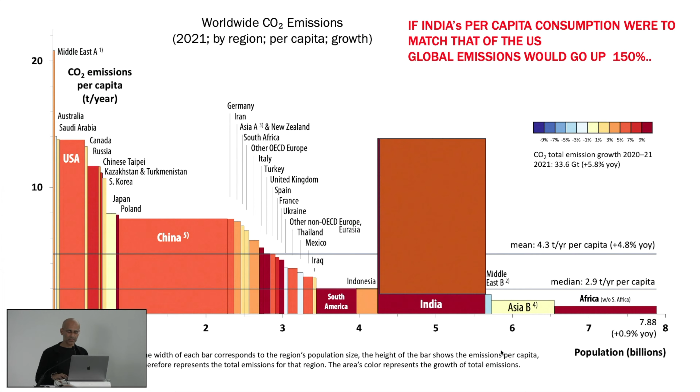Mahatma Gandhi seemed to have predicted this way back at the time of India's independence.

In order to further situate the context of our practice, I would like to go a little deeper into understanding the region. Even at 1/3 the area of the US, India has nearly the same number of climatic zones, making it incredibly diverse, generating 21 agroecological regions, which results in creating amongst the most diverse regional cuisines in the world, based entirely on local and seasonal produce.

Culturally, there are over 2,000 documented artisanal craft forms still alive across the country, even though a lot of them are rapidly fading. We are home to 400 living languages with thousands of dialects. We are many countries in one.

Our traditional lifestyles, which are mostly still vibrant and alive, are based on strong regional responses, creating multiple cultures that live in harmony with their context. Richly diverse, highly local, impacting language, rituals, food, clothing, and of course, building.

A few examples: such as in Kerala, on the southern coast with its hot and humid climate, where people's clothing is as porous and ventilated as the buildings they inhabit. The food they eat promotes cooling in the body, and a majority of the population still lives comfortably without air conditioning.

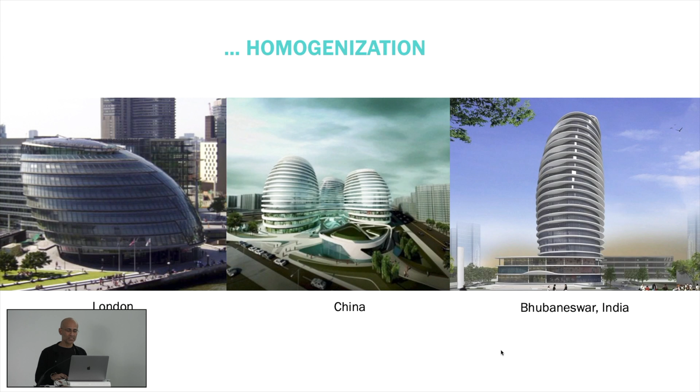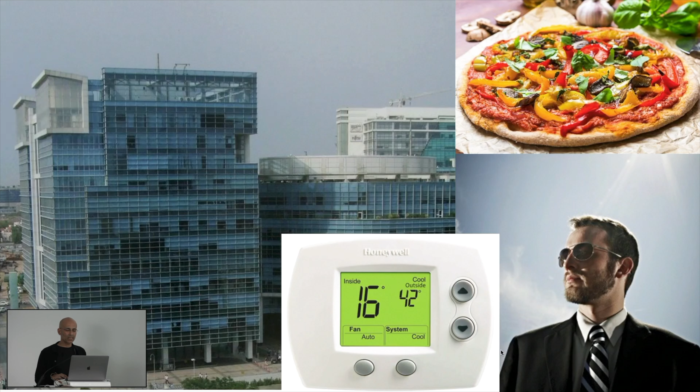In our buildings, our food, our clothing, right down to the standards of comfort we aspire for, readily discarding indigenous wisdom imbibed over centuries. What then can we do differently today?

Can we find ways to interpret the wisdom that surrounds us in a way that speaks to our collective future, giving us possible solutions? In our own little way, we've tried to do this through our practice, through values that begin to shape our work and our projects.

We have always been a country of frugal means, of doing more with less. How do we build in a way that keeps handmade relevant at increasingly larger scales? Designing passive and low-tech versus going for high-tech solutions, bringing innovation within reach to a larger spectrum of population.

Looking beyond just preserving historical structures and increasingly adapting ordinary structures for their embodied carbon. What does it take to do buildings that endure materially and that people continue to love?

A lot of our clients are high net worth individuals and luxury brands. We recognize that we have a chance to influence aspirations for the mainstream, to create pride in the local. And for that, digging into the huge repository of craft that our country offers to create beauty using indigenous techniques, as we continually engage with how we could tread lightly on the planet, physically and metaphorically.

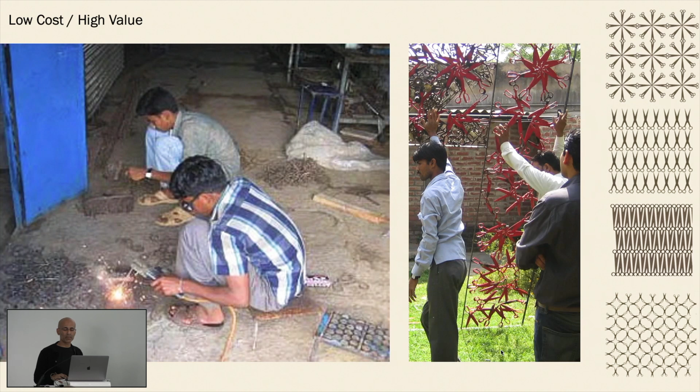They hand-welded 12,000 locally sourced scissors into 12 different patterns, which were mounted onto individual frames off-site and bolted on-site onto a light metal framework, which was inserted into the bare shell, which was painted white. All the services, air conditioning, and electricals ran outside of this lattice cube.

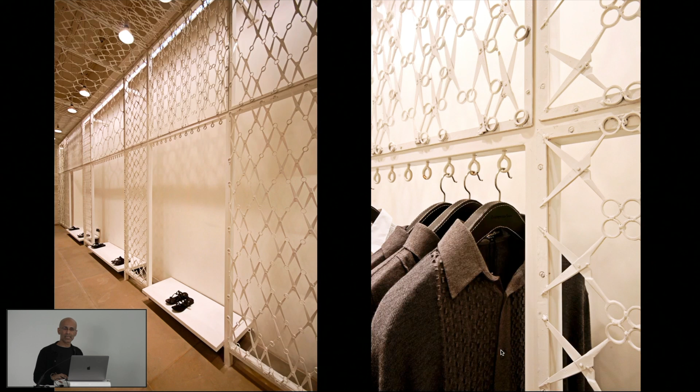The clothes were framed by this lace-like filigree. As you can see in the image on the right, the imperfections of the hand welding only added to the tactility of the space. I would say this was a fairly successful project in many ways, budget-wise, time-wise, and most importantly, in delivering a distinct brand proposition using a frugal, handmade approach.

We scaled this understanding to a totally different level when we had the opportunity of working for a client building a boutique hotel that later spread its reach across various regions in India, which gave us a chance to interpret this approach of regional luxury in different contexts.

In fact, this is the project where I met Troy and the students in Jodhpur. So this is the site in the walled city of Jodhpur in Rajasthan. It's a 6,000 square meter plot.

The lanes brought us to this old gate, which opened onto this spectacular view. The 3 old historic buildings had been occupied earlier by multiple families living in them, who had modified them crudely over time to suit their needs, but left them with little semblance of the original architecture.

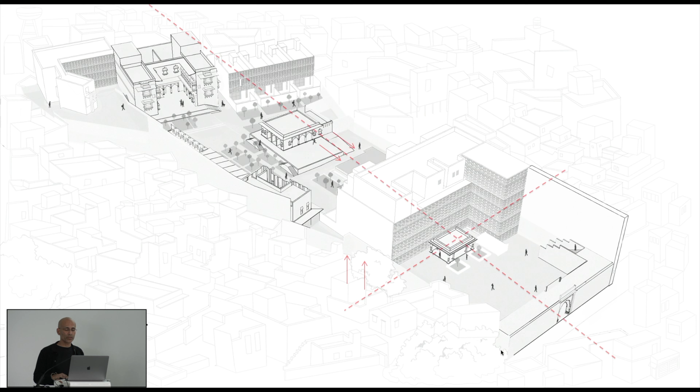The program demanded 40 guest rooms. Our site plan looked at restoring the 3 historic buildings as anchors for the site, comprising the public spaces with the restaurant, pool, and spa, and the rooms then get built around them as 3 new buildings, which would retain the relationship of the old buildings with the central courtyard and the fort.

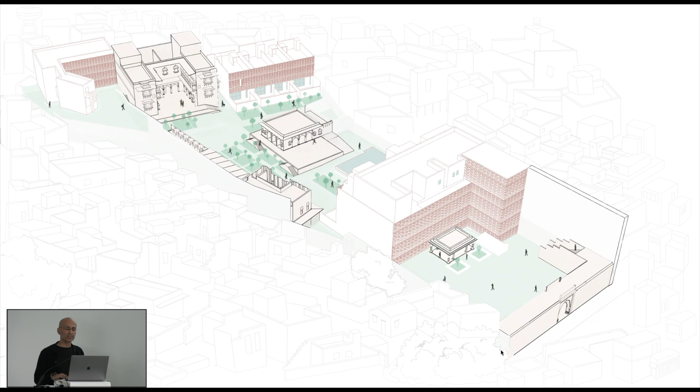That way, the first block becomes the second gateway to the site after the main gate, and the rear 2 blocks become the canvas for the 3 historic buildings, which in turn visually connect to the fort.

We identified what could be removed from the existing buildings, peeling away layers of poor interventions, paint, restoring traditional details in stone and lime until the jewel-like form of these historic buildings emerged from within and started reconnecting their shared history in conversation with the fort in the background.

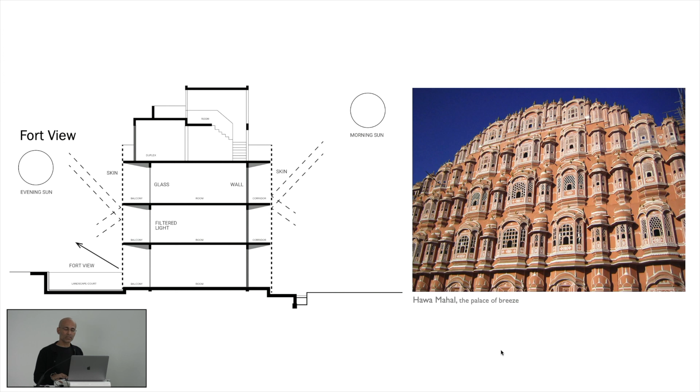The second more challenging part was designing the new blocks in a contemporary idiom. These buildings had to be west-facing because of views to the fort. We designed them as double-skin structures, like the traditional ventilated double-skin Jharokha structures of the region.

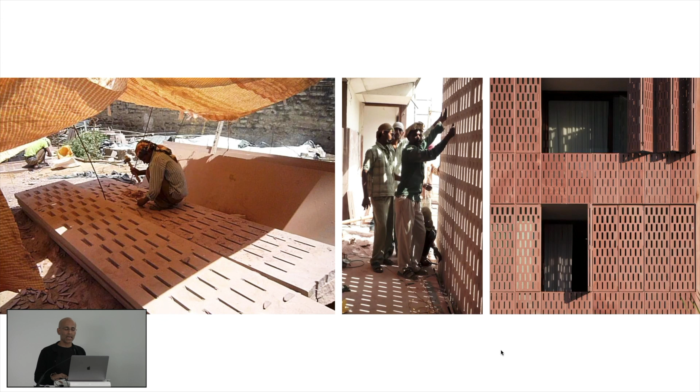The CNC process would have worked out even slightly quicker at a similar cost. However, the client and us agreed on staying authentic to the handcrafting process and chose instead to modify the elevation to a simpler, more graphic pattern that could be cut by hand in the 20 mil stone. Eventually this worked out even better than we'd imagined, giving us a more graphic, contemporary elevation, which became part of the balconies and the naturally ventilated circulation spaces, negotiating privacy and transparency, infusing the new blocks with a changing quality of light and shadow cast by the sharp desert sun.

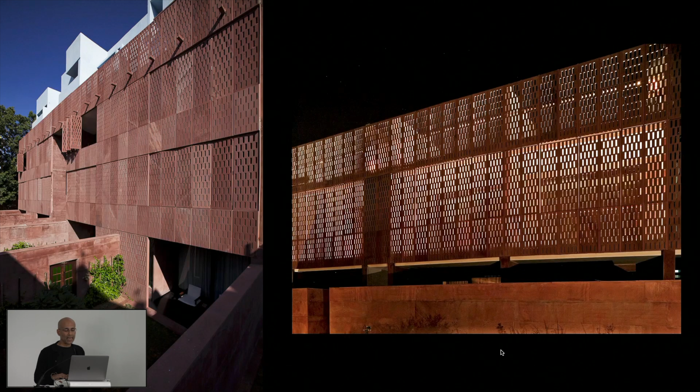The most challenging bit was detailing the openable stone balcony shutter, 420 kilos of stone that needed to be moved by a guest. This was developed over a 5-month period with local millworkers and stone craftsmen to create this dynamic facade, which guests interact with, and the facade changes through the day. At night, the stone filigree feels like fabric as the three new buildings become lanterns framing the site.

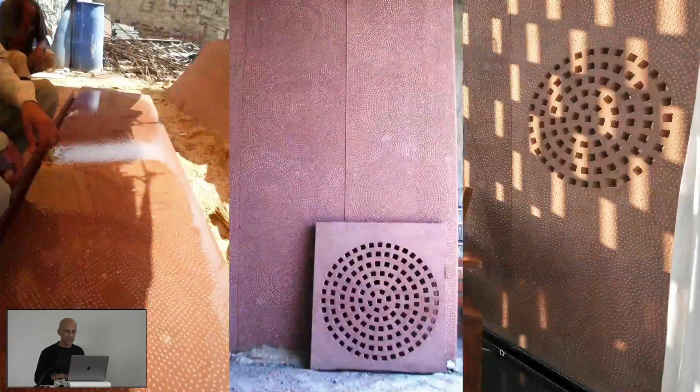To breathe life into the smooth quarry-cut sandstone slabs, we turned to the craftsmen at site, and over multiple prototypes generated hand-chiseled patterns in situ, translated onto the stone surface seen on the left. These are 50 mil thick, 3 meter high, solid stone partitions from the neighboring quarry that divide the bathroom from the room, as seen on the right. These also find their place on the solid stone hand-cut perforated headboards for the beds, which also serve as a nightlight. The project works on creating a conscious dialogue between the old and the new, seeking a seamless experience of history and the present.

We realized through working on this project that it is only when you have your eyes and ears to the ground and engage with local artisans on site, working with materials of the region, that you can truly tap into the site's true potential.

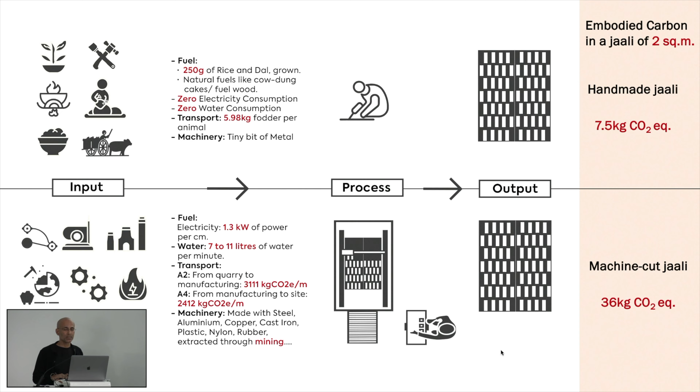Our more recent studies on embodied energy have shown us that the same lattice stone panel, when handmade, carries about one-fifth the embodied energy compared to a CNC machine-tooled one. In addition, you get the socio-cultural impact of reinvigorating traditional skill in the community, and of course the very special organic feeling which only the handmade can give, all at the same cost as the machine-made in a country like India.

It is important to note here that for us to tap into this hidden potential, we needed to move beyond the comfort of our drawing boards, trust the process and the wisdom of the artisans and other stakeholders at site, and be willing to let them co-author the final outcome.

I'll take you now to a totally different context for the same client: a 40-room hotel in Dharamshala, a region which is the home of the Dalai Lama up in the Himalayas, a project that's still under construction. With spectacular views of the Himalayas to the north and the tea-growing valley to the south, the architecture here takes a totally different form while celebrating the same values of contemporarizing the vernacular.

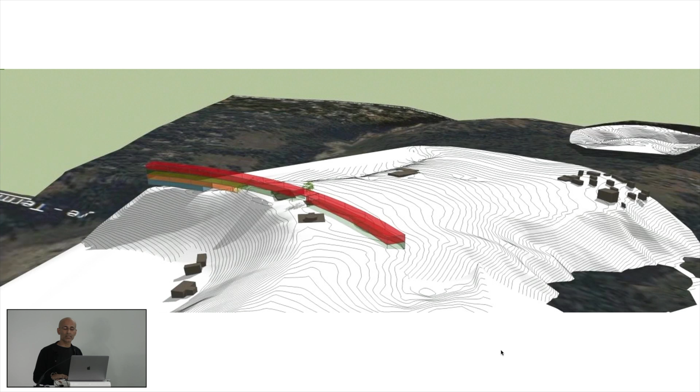The building is designed to straddle a ridge, and we use the contours of the hill to create a single 220-meter-long building with 40 rooms.

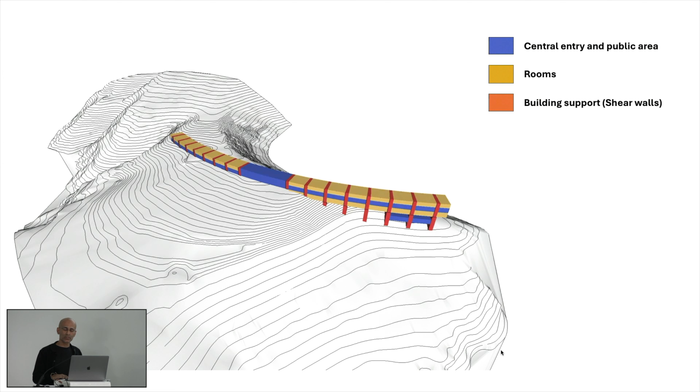The red vertical spines are individual staircases that lead to the rooms in yellow, above and below the blue band at the ground level, which houses all the public amenities such as the kitchens, restaurant, and the spa. This way, the rooms have no corridor on either side and have balconies on both sides to enjoy uninterrupted views of the mountains to the north and the valley to the south, whilst being totally private from each other.

The Buddhist monastery inspires the form with its silent, powerful rhythm, whereas the materiality is derived from the local village homes and temples of the region.

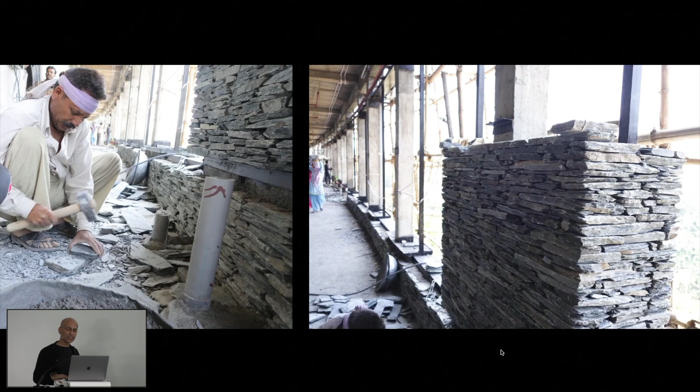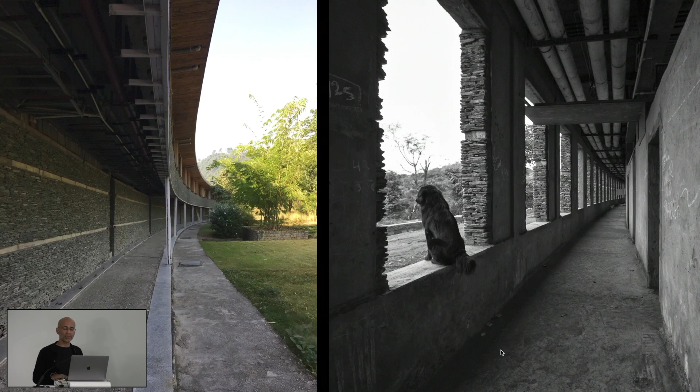We used waste slate from local mines, and the same group of masons who had worked with us in Rajasthan came in and honed their skills with local Himachali masons to build this sweeping form of the 200-meter-long building with its thick masonry walls that give the building thermal mass for its radiant heating system, giving it its timeless expression that captures the rhythm and materiality we sought to express.

The southern face of the roof is entirely skinned with solar panels which feed the heat pumps. This is a view of the building as it peels away from the sloping hill and sits against the mountains.

Engaging deeply with the site and local material and skill spoke to our aspiration of giving the building a timeless expression that situates itself between the contemporary and the vernacular. Here's a short film to give you a sense of the scale of the building on the ridge.

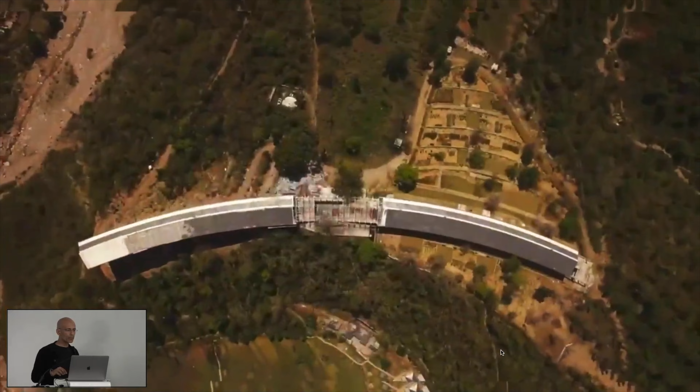I'll move on to the third project for the same client, to create another context and a slightly different brief. Situated between Jodhpur and Jaipur in Rajasthan, on an 800-acre rewilded forest, a bioreserve on a private estate, with a 200-year-old rainwater check dam on which the original owners used to run a 12-tented property, which was seasonal.

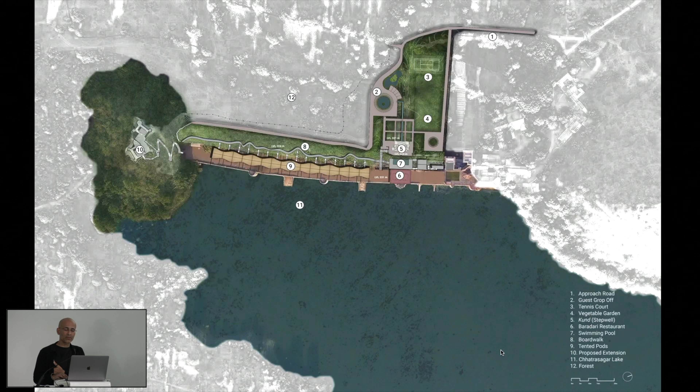The business became unviable and our clients entered into a joint venture with the family to convert it into a perennial property. We opted for a simple curvilinear plan on the dam to up the room count to 16, with the public amenities at the right corner of the dam, which could be serviced independently.

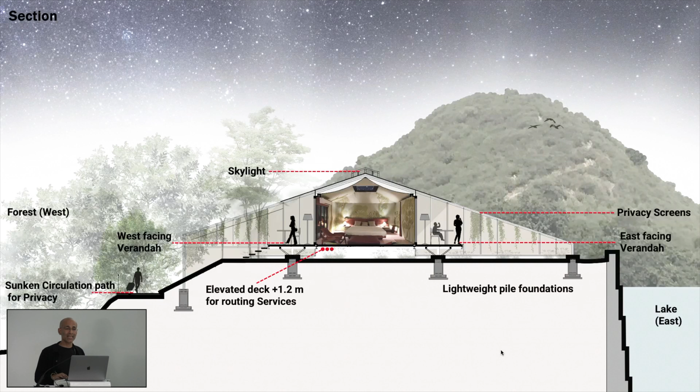The section shows how we sunk the circulation on the forest side of the dam. This gives guests uninterrupted private balconies towards both the lake-facing sunrise and the forest-facing sunsets. Due to the fragile nature of the 200-year-old dam, we needed to create a building that was almost as light as the original tents and used almost no concrete.

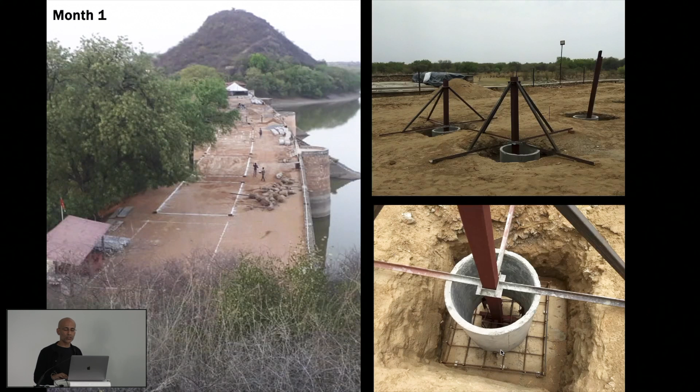We had only 8 months to build the whole project and designed a very light foundation system of precast Hume pipes filled with stone and lime, off which we took the elevated framework for all the tents, which allowed us to run all the services under the slab without digging the topsoil.

For the interiors, we worked with a young RISD-trained printmaker who spent weeks on site sketching the flora and fauna of the region and converted that into a new intervention of block printing of the region.

She converted these sketches into large hand-carved wooden blocks, 6 to 8 feet tall, which are then transferred onto the linen that forms the tent, and further hand-embroidered with the migratory birds and animals that come to site. Each tent has a different composition.

We take the same narrative into the furniture, hand-carving the casings for the air conditioning units, custom designing the camp-style furniture, and having it made in native kikar wood, all of which come together as happy surprises of varying compositions.

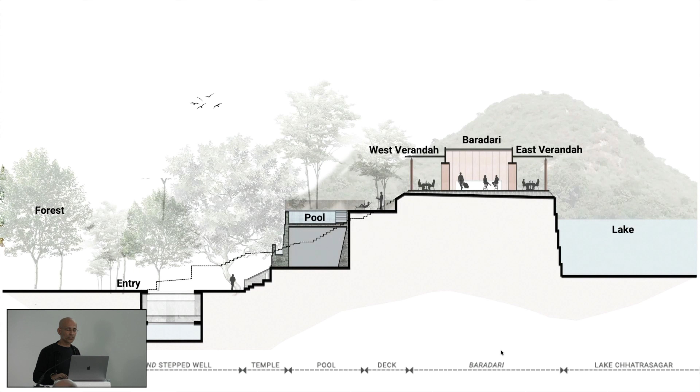The building is lightly perched off the dam similarly, with a wraparound veranda, and the pool on the sunken side of the dam seems to cascade down into a traditional stepwell, which also forms the entry plaza.

The construction system uses no concrete, and is a composition of hand-carved regional sandstone clamped onto a steel structure, and where people touch the stone, it is hand-chiseled. The air conditioning grills are hand-cut at site.

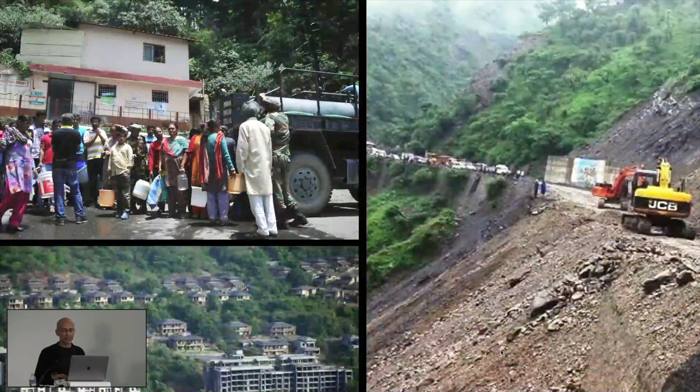The biggest problem in these hills is the impact of rampant unplanned construction and the torrential rains in the region, which cause severe erosion and landslides. And in spite of all the rain, there's a scarcity of water for human consumption.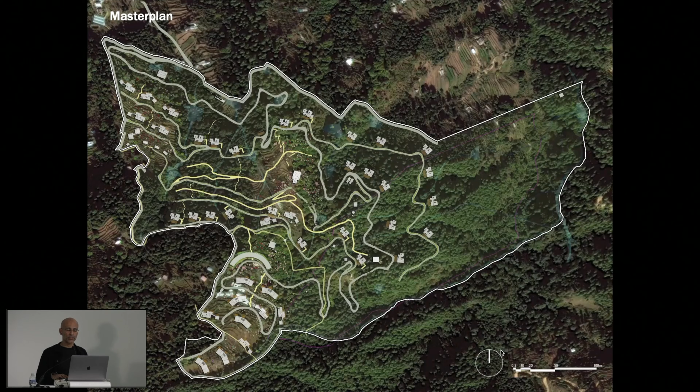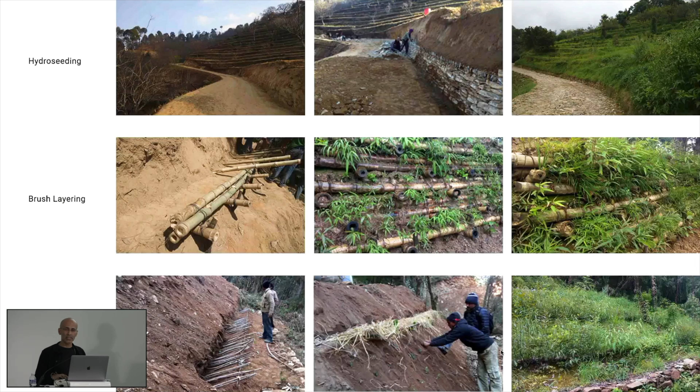Together with the landscape architects, we developed an ecology-first master plan, first mapping the natural water runoffs and green belts, around which we developed our road networks and the location for the houses and hotel. This got translated on site in the manner in which the roads are cut, with minimal cut and fill, and very small dry gabion retaining walls. Slope stabilization is done using bioengineering methods of hydroseeding, bamboo crib walls, and brush layering.

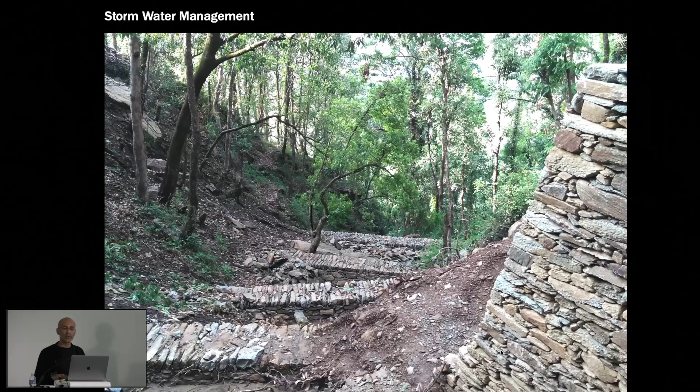For water retention and management, we built about 300 micro check dams of dry stone across the swales on site, which over a period of 3 years have not only retained water for the site, but have regenerated the artesian wells of the villages downstream, which were dry for years. This has begun to revive the entire ecosystem of underground aquifers.

creating a remarkable transformation. The houses themselves are collection points for rainwater. The water collected from the rooftop of one home gets used by the home downstream through a gravity-fed network. The wastewater too gets recycled and used in a similar fashion.

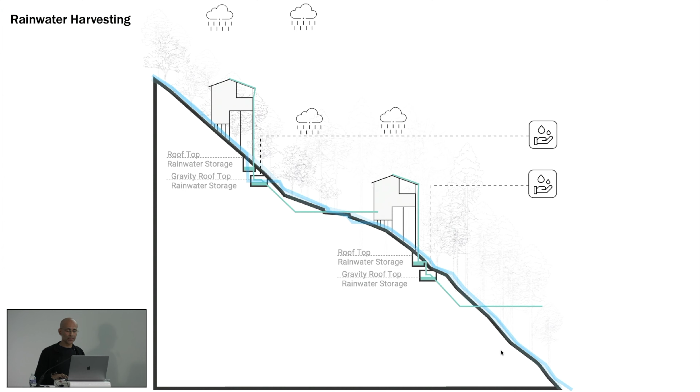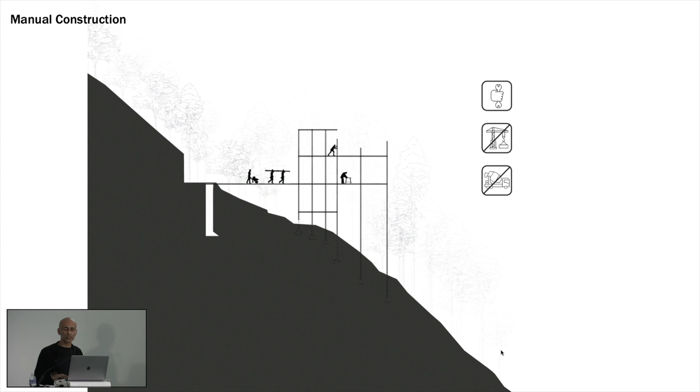We've tried to build in areas on site which are non-productive, on slopes virtually impossible to build on using traditional methods of construction. We developed a construction technique with almost no cut and fill, with minimal alteration of the slope of the hill. To ensure the surrounding trees and slopes do not get damaged, we developed a construction technology where we didn't need cranes or heavy machinery to build.

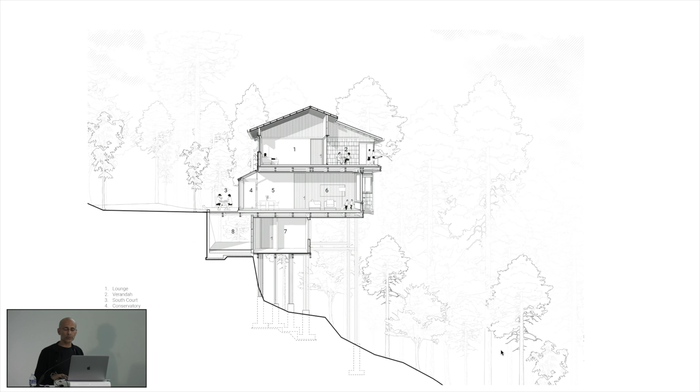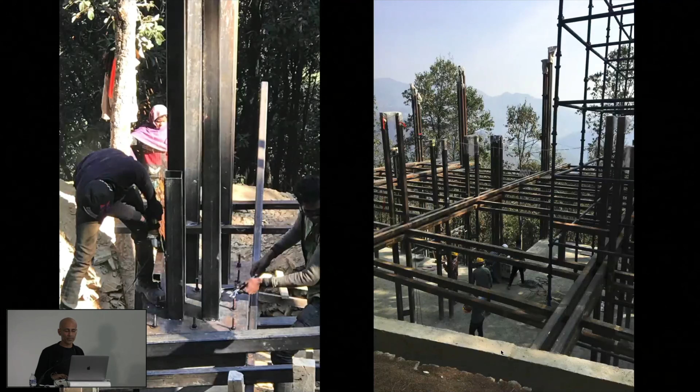Thereafter, a multi-layered dry construction system creates a highly insulated shell that achieves passive house standards. The structure could be erected rapidly, with the trees around still intact. Timber and slate serve as the facade rain screens.

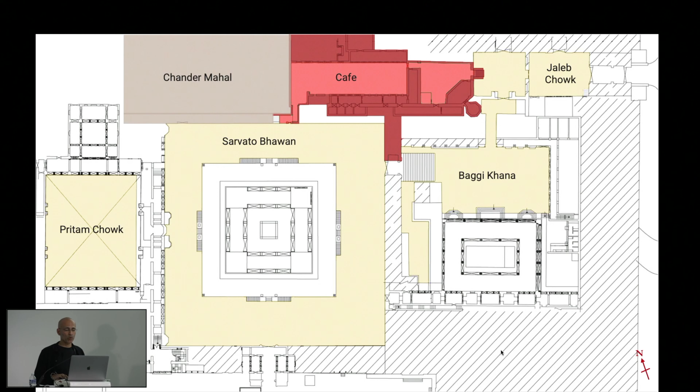Back to Rajasthan. First in the historic city palace of Jaipur, where we were invited to refurbish a small cafeteria within the precinct of the City Palace Museum. The brief was to refurb the old cafe to create a new destination for tourists and locals alike.

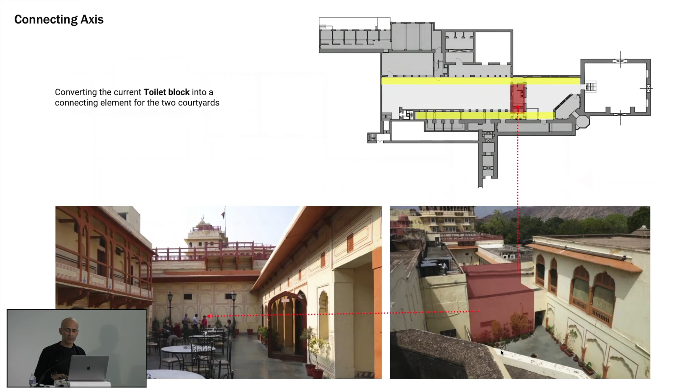We proposed rearticulating the central courtyard by replacing a vestigial service block with a new connecting pavilion and opening up a new entrance from the city, so that the space becomes a connector to the city for the museum after closing hours.

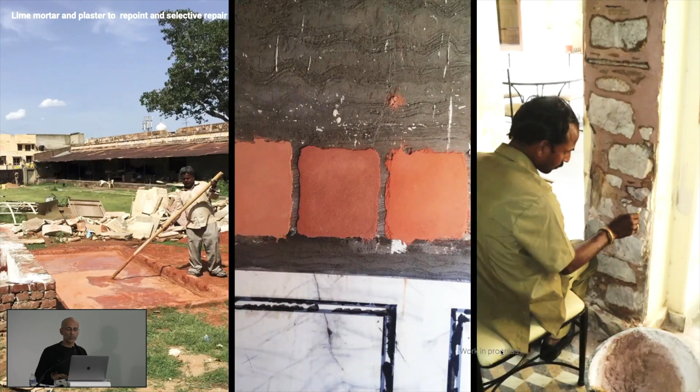We began to strip off layers of cement plaster and paint from the relatively poor renovations that had been done over time, to reveal the spectacular stone masonry beneath, which we repaired using lime mortar made at site. These are before and after images of the same space, showing how the reinterpretation worked.

Delightful transformations became possible. This old office block on the left got converted into a lounge. The buildings started to speak of the history through their materials.

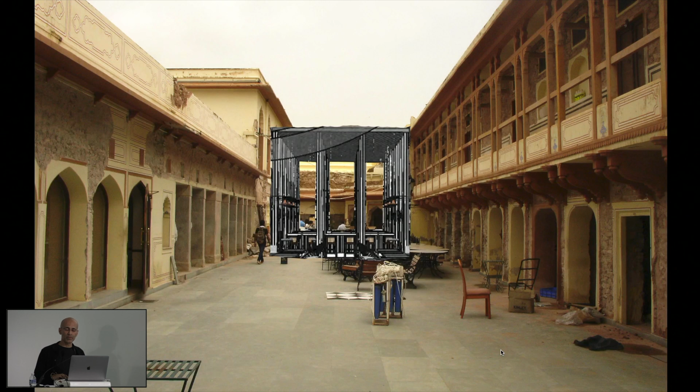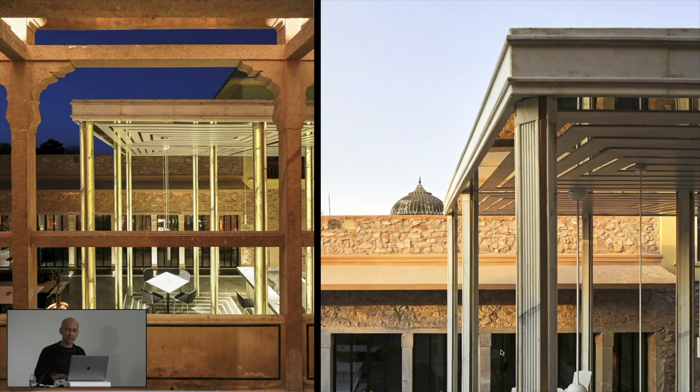We conceptualized a lightweight contemporary pavilion that anchored the two courtyards and housed an island bar within it, made entirely in a lightweight metal frame and handcrafted local marble, which was honed down to a thickness that made it translucent and created a dialogue between the old and the new.

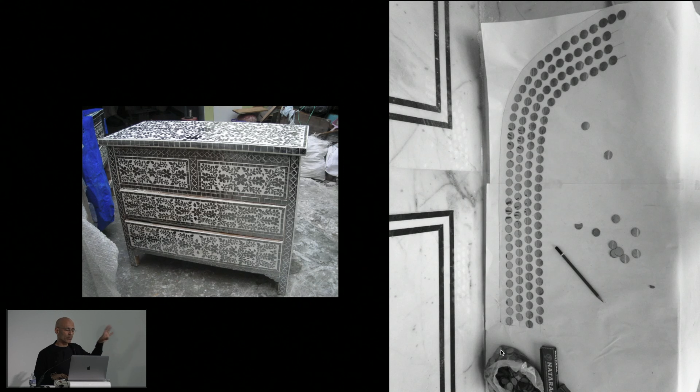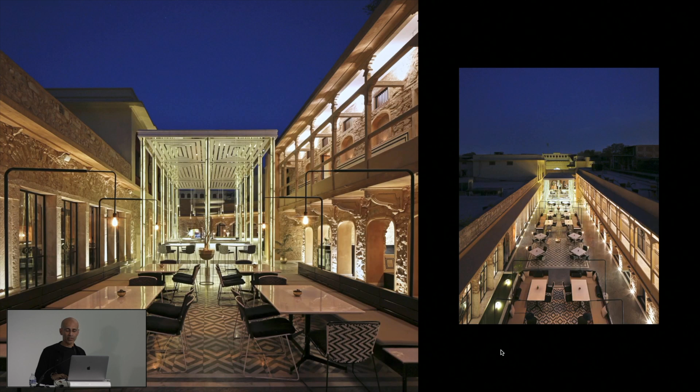We reinterpreted other craft, such as this traditional hand-cut tikri mirror work - the image on the left shows how it is used traditionally, and we converted it into newer, more graphic motifs that find place through different zones of the project. We developed different weave patterns for furniture made locally based on textiles of the region, which all come together as a tapestry of texture and gives the city a new watering hole that looks to the future while celebrating its past.

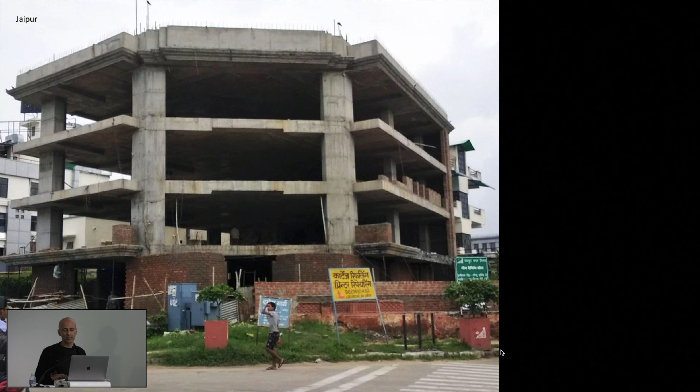We addressed a very different concern in the same city more recently when we were asked by a leading jeweler to build a new retail store for her. We were handed a plot with this structure which had been recently built by her, and she was unhappy with the way the building was shaping up and brought us in.

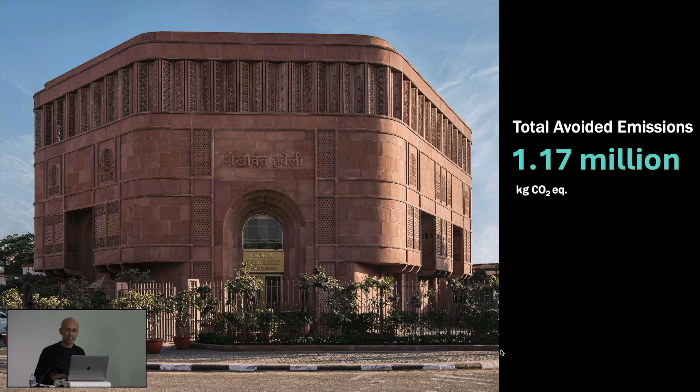She asked us to bring the structure down and give her something spectacular. We felt it would be criminal to waste this newly built sturdy concrete frame by bringing it down. So instead, we retained the structure, reshaped the slabs, scooped out connections, and reworked the facade to create this building, which has a museum on the ground floor that we proposed, a retail space on the lower ground and first, and a proposed cafeteria on the top porous floor with views of the city. In the process, we saved over 1,000 tons of embodied carbon.

The handcrafted stone facade echoes the Indo-Saracenic roots of the city's architecture and is a synthesis of the Deco, Mughal, and Rajput styles, all of which have influenced the region.

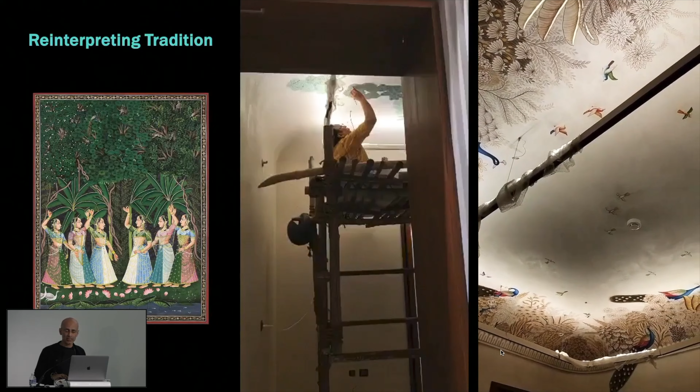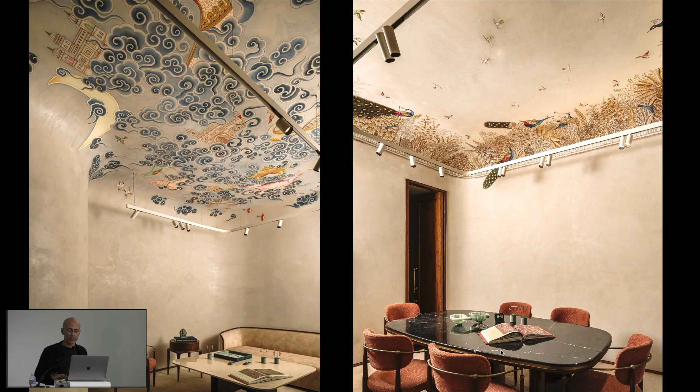The narrative continues to the interior, where all the multiple retail zones are defined by frescoes done on ceilings painted by Jaipur miniature artists who usually work on an A4 sheet of paper. It took several months of prototyping and us working closely with them to create scales and forms they were unfamiliar with, and they ended up delivering spectacular hand-painted narratives of the gardens of the region that populate multiple zones as you meander through the store. The project thus becomes a contemporary handmade symbol both for her brand and the city.

We've taken this idea of circularity to a new build, where we began to consider the idea of a building that could be reshaped as per emerging needs. This is a competition project we won for a new visitor center at the Mehrangarh Fort in Jodhpur that's being built at the base of the fort.

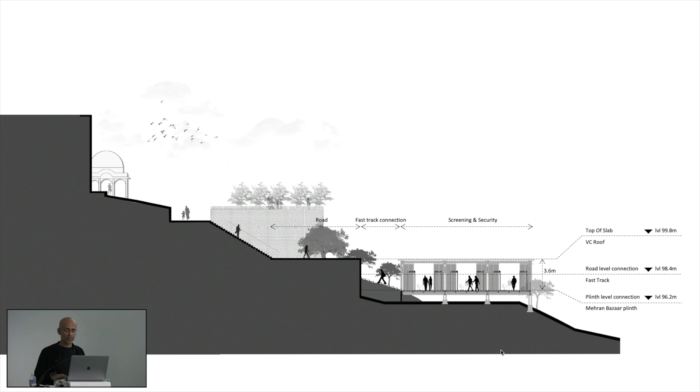The building is proposed as an entirely naturally ventilated pavilion stilted off the rocky valley such that it does not alter the natural terrain and flow of rainwater. We propose a building that gets sunk into the valley, that exists south of the entry road leading to the fort, becoming the gateway to the fort below the datum of the road.

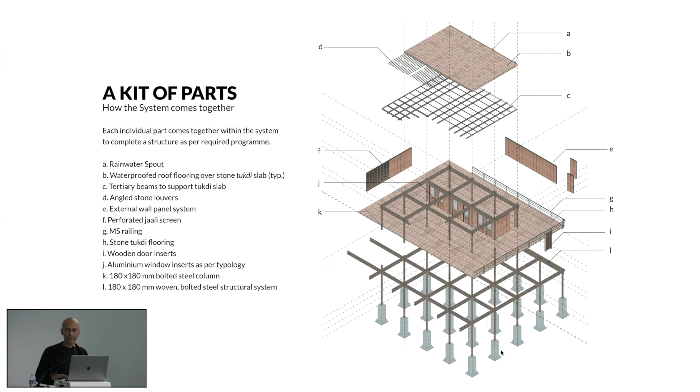The new building is sited in place of the old structure that had to be partly demolished, as the purpose it had been built for had changed. We took our cue from this and proposed looking at the new structure as an adaptable system of metal and stone without using any bonding agents, where the building can be reshaped or dismantled and moved and reconfigured for new uses that might emerge in the future.

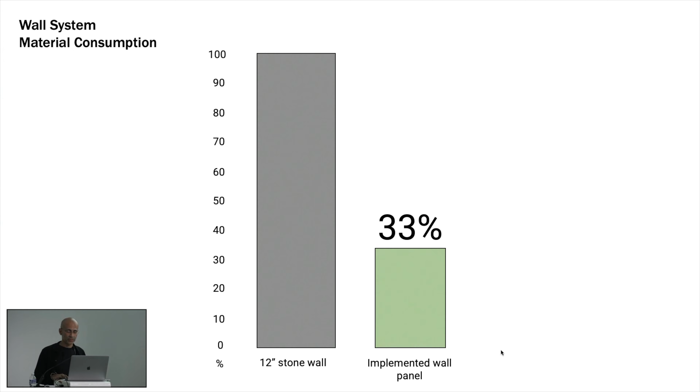This system uses one-third the amount of stone as the usual solid stone masonry buildings of the region. The modular steel structure is designed such that it can be reconfigured easily and is designed to take in stone panels 3.1 meters tall and 50 mil thick from the neighboring quarry, either as insulated double-skinned walls or as brise-soleil screens. The building is made with horizontal shelves and lintels that slide in as a system of assembly which can be disassembled if needed.

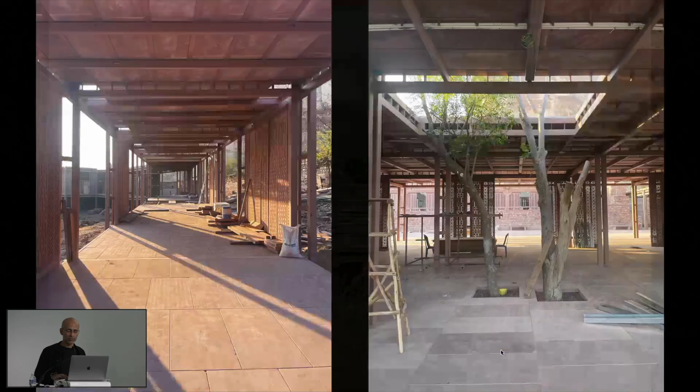This technique allowed us to retain the trees which slice through the structure, how the building sits perched lightly on the edge of the slope, the sun-shading lattice walls that create a porous, naturally ventilated space. Artisans once again breathe life into the smooth quarry-cut stone slabs.

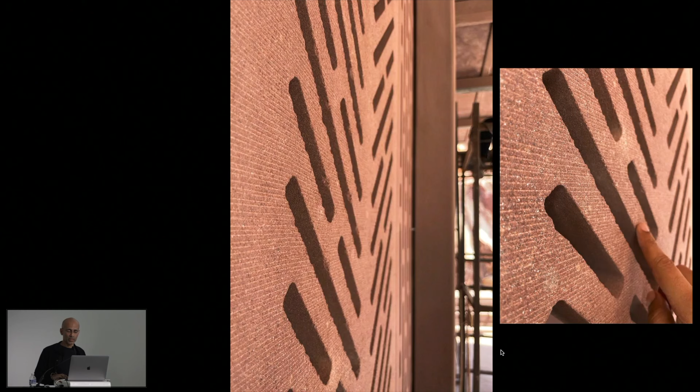The project is a prototype which appropriates engineering and craft as a synergetic whole and proposes a system that's rooted in the region, yet creates solutions that are circular, frugal, and forward-looking.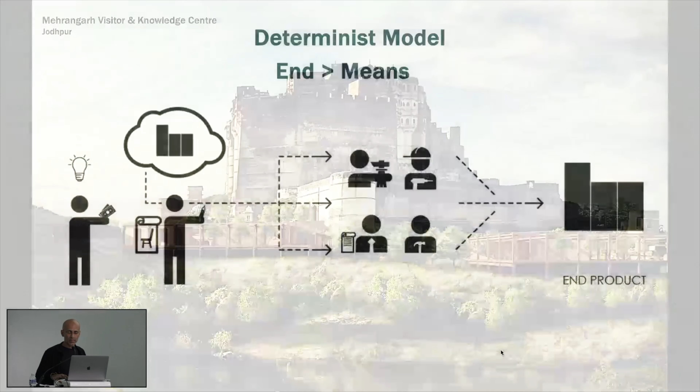So this brings us to how we've evolved our way of working from the kind of projects I've shared, which has taught us that a classical deterministic model, where the architect is the author and directs everyone to follow their instructions, allows lesser degrees of freedom for other stakeholders to contribute to the creative process. A more participatory model is slightly more emergent and allows multiple stakeholders to shape the final project, often producing a richer outcome. This process needs our drawings and approach to be flexible enough to allow for improvement or contribution at different stages of the project, which is difficult but immensely rewarding.

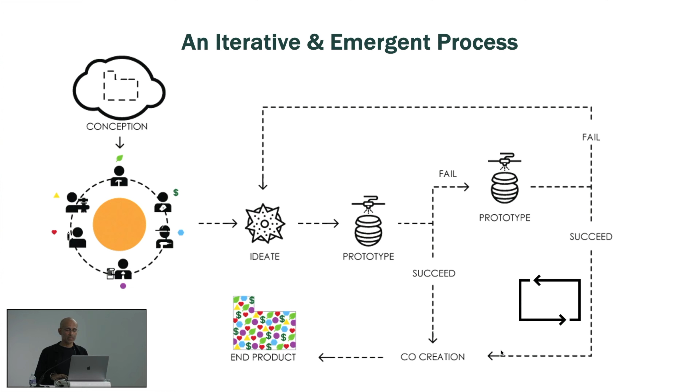So what becomes important is not the design vision of one person or the author, but a process that can empower and engage people deeply at each stage. That's something we've tried to bring into the organizational design of our studio over time, and we're continuing to work on it.

We realized early on that design driven primarily by the principles of partners has its own limitations, and we looked at processes of collaboration which included other team members and clients. Now we've begun thinking of the studio as something alive beyond its walls, as our values get shared, articulated, and seeded in different stakeholders who become our partners in thought. For instance, we work extensively with our studio alumni as an extended network. Our consultants, contractors, artisans, and vendors all become participants in the process. The more boundaries we remove, the greater the innovation we're able to harness.

What then keeps us together, what guides this process, is really a set of internal guiding principles which has evolved over the years. It is the glue that holds it all together. Each of these has been defined in some detail, and I'll give you a sense through a couple of examples.

One of our values is trust. It's critical for the process. We believe that each person will strive to do their best if given the opportunity. So our focus as a studio is to create the right conditions for this to happen within the studio and the project. You can only do that when you view the people you work with not as a means to achieve your vision, but as custodians of the process. This has become a cornerstone for our studio, where we attempt to harness the genius of all the stakeholders who form this extended team.

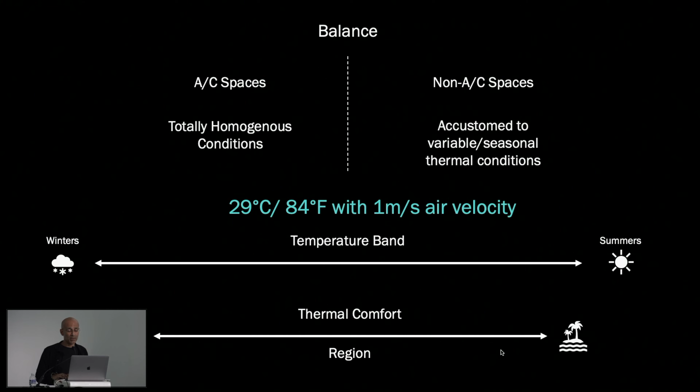We designed a night purging system for 85% of the building, which uses the drop of 12 degrees between morning and evening temperatures in the peak of summer as the cool night air becomes our cooling device.

The building has a high thermal mass, which stores the coolth. So in the evening, when the office is shut and temperatures fall, this cool air gets drawn into the building and stored in the walls, furniture, and partitions, while warm air is sucked out through the solar chimneys towards the courtyards. During the day, these vents close once temperatures begin to rise. Fans come on when people walk in, and the entire thermal mass of the building acts like a giant cooling sink.

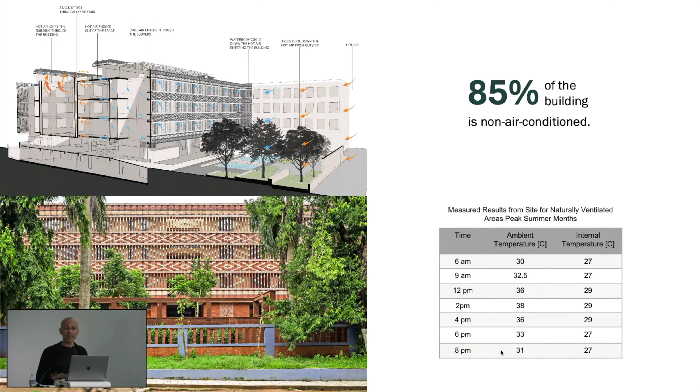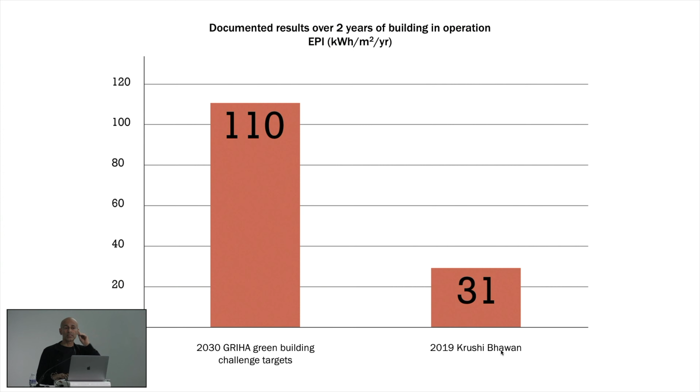Post-occupancy analysis has shown tremendous success in peak conditions to meet the Indian IMAC standards. Most importantly, the building consumes one-third the energy consumption of what are set as the national GRIHA Green Building Performance Targets for office buildings in 2030 to meet India's SDGs.

Here you can see all the corridors which are naturally ventilated and shaded, and the building with its courtyard morphology. The building's facade pattern has a strong identity derived from the textile weaves of the region.

We used 4 colors of brick using 4 colors of clay, which represent the different soils of the state, as louvers that shade the glazing and give identity to the building, creating a graphic expression that celebrates the region, and moves away from the usual aspiration, especially in Indian smaller cities, for the contemporary expression they seek through steel and glass. We convinced the government to become patrons and give patronage to a body of regional skills and craft at an architectural scale.

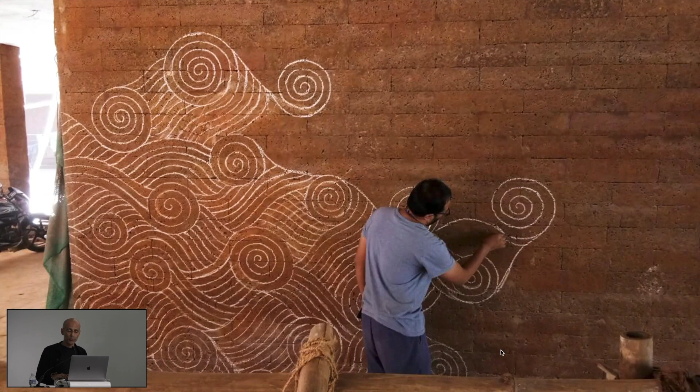It was interesting for us to find that most artisans in the region are farmers who work as artisans part-time in non-farming seasons. We were fortunate to find a local architect from the city of Bhubaneswar to run this part of the program for us. We created the brief, created the canvas of the public spaces, and then left it to him and the craftspeople to take ownership of the project and lead this crafts program.

For this to really succeed, we had to let go of trying to control the process and work in a more facilitating and collaborative way, really trusting the process.

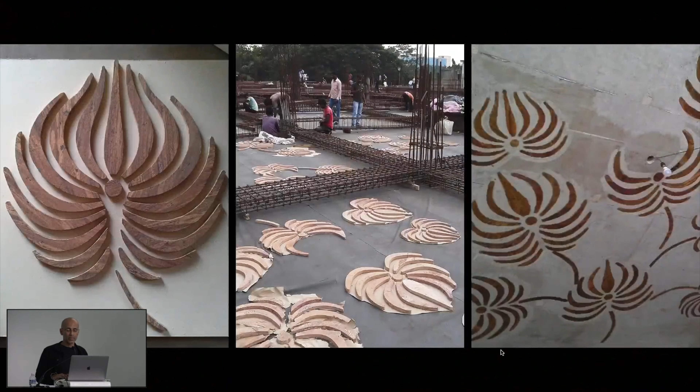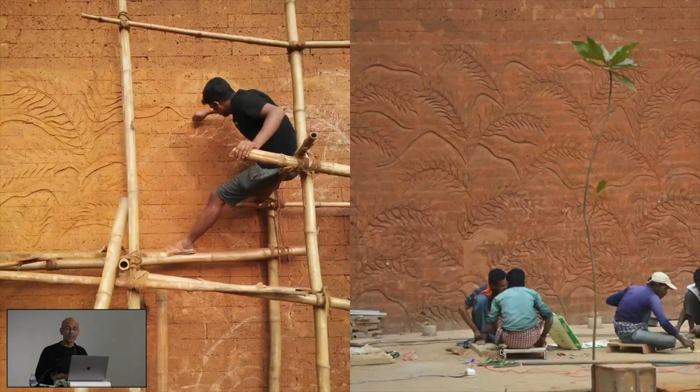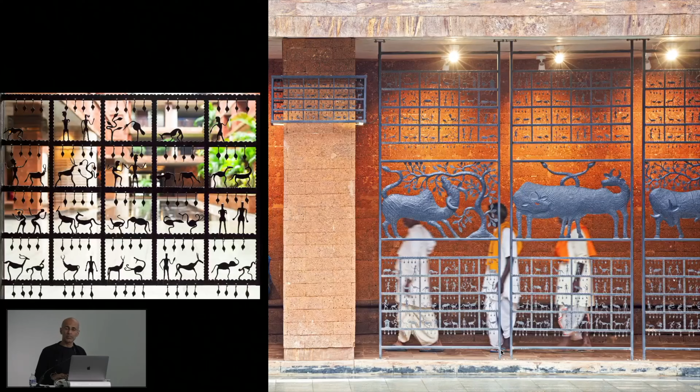They created narratives at site around mythology, so there were 50 people working for 6 months at site around agriculture, all related to the theme of the land and something familiar to the locals, such as these khondalite stone lotuses cast into the roof slabs, or the way the service shafts were screened in hand-carved stone lattices, the way the dead walls of the large mass of the auditorium were carved in situ with larger-than-life paddy crop, the bastar metalwork of that region used as screens and lighting devices, also as building signage, and how the building sits in context of the city.

I'm going to leave you with a video that captures what the experience of the artisans working on the project was.

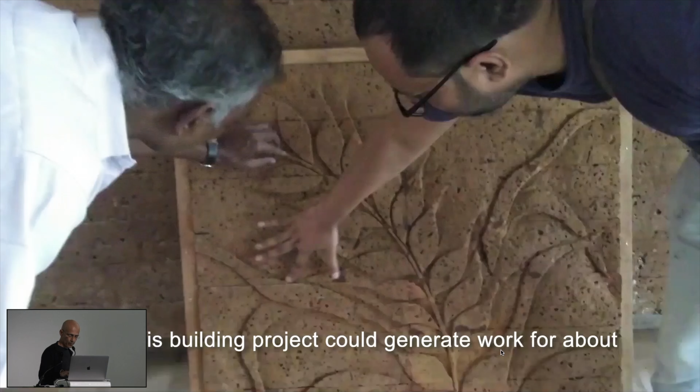We were quite excited with the quantum of work that could be generated if artisans, craft and architecture could come together. I think that has been a big achievement, that this building project could generate work for about 50 artisans for a continuous 6 months.

And we actually got artisans who had stopped working with the traditional skills. We convinced them to come back and start working again.

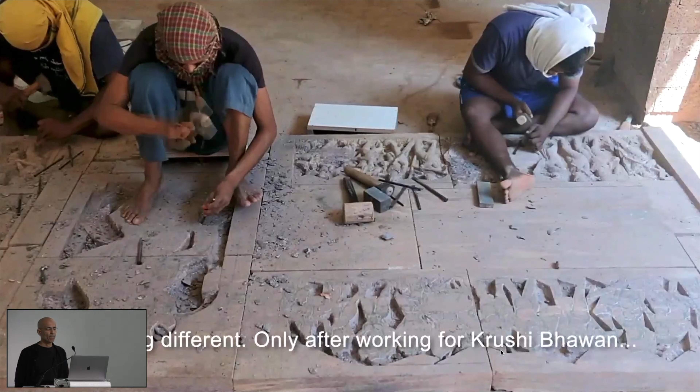It's a perfect setting for us where we could bring in artisans and craft. If you talk of farmers and people coming from villages to this building, then we want to show them something that's familiar to their environment, and that is where craft comes in.